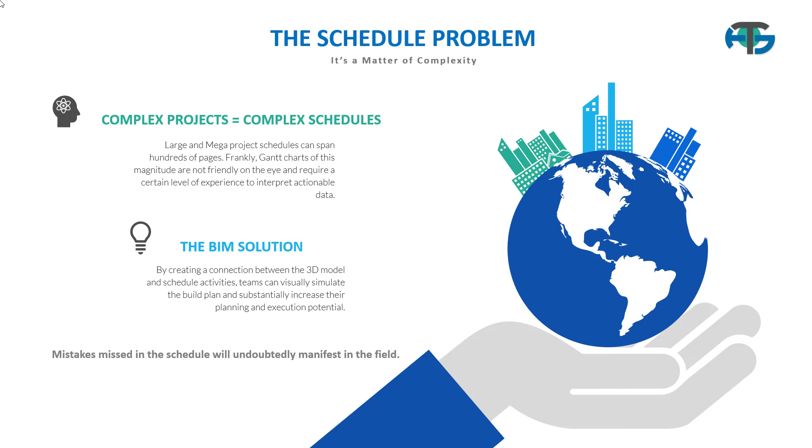So let's jump right into the building information model philosophy and analyze what that really is. BIM essentially allows designers to predict the performance of projects more easily before they're even built, respond to changes faster, optimize designs with analyses, simulations, and visualizations, and ultimately deliver higher quality construction documentation.

But the scope of BIM really goes beyond just the 3D modeling component that it's known for. It's further defined by dimension subsets built upon the most notable third dimension, being the object model itself, to the fourth dimension, or 4D, which includes time, to 5D, which integrates the cost factor, sixth dimension, or as-built operation, to 7D, which involves sustainability and revolving around that carbon footprint, and even the eighth dimension that incorporates safety factors.

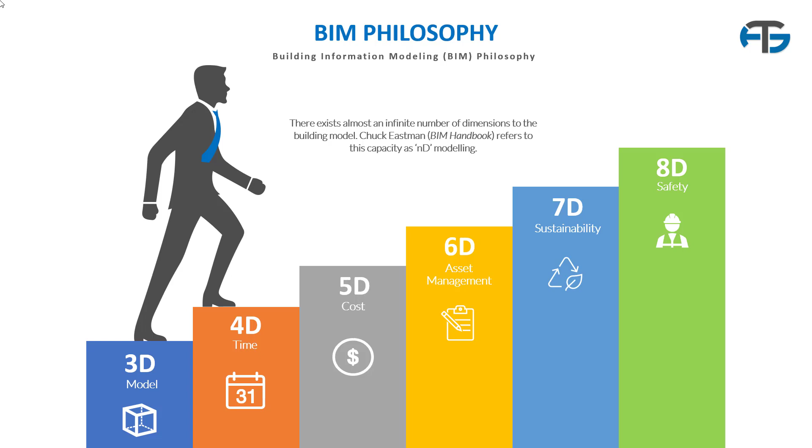Chuck Eastman even expressed in the BIM handbook that there actually exists almost an infinite number of dimensions to the building model, which he defined as ND modeling, or modeling to the nth dimension. Let's really take a closer look at and analyze these BIM dimensions further in the following slides.

So the fourth dimension, in short, is the planning process that links the construction activities within the schedule to 3D models, which essentially creates a real-time visual simulation of the construction process over time. Ultimately, this process enables for the assessment and evaluation of the project's workflow and constructability.

As this will be the focal point for our presentation today, we'll further analyze 4D and its transformative nature for the construction industry in the following slides hereafter.

We'll go over fifth dimension, or 5D BIM, which is the integration of cost to the model, allowing for the generation of budgets, incorporation of earned value management, and other financial illustrations of the model against time. 5D models help reduce time for quantity takeoffs, increase estimation accuracy, and really allow additional time for cost professionals to spend on value improvement rather than revisions.

6D, or the sixth dimension, extends BIM for facilities management. As the 3D model includes valuable data of all building elements and services such as engineering, it provides an integrated description of a building. Using this consolidated description with the geometry, relationships, and property capabilities makes it a useful database for asset management. This is where the prescriptive and preventative maintenance process happens.

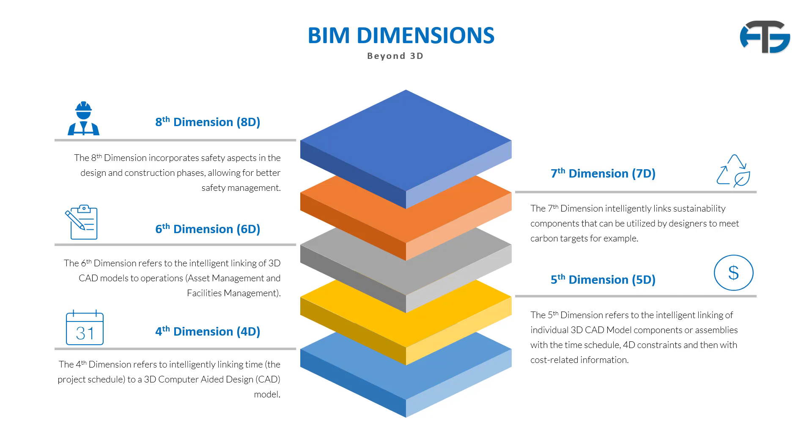So far we've covered the scheduling problem, which was essentially a matter of complexity in today's evolving project environment. We've dug into a little bit of the BIM philosophy and analyzed the BIM dimensions throughout. Now, what I'd like to cover is what 4D BIM and 4D planning actually is.

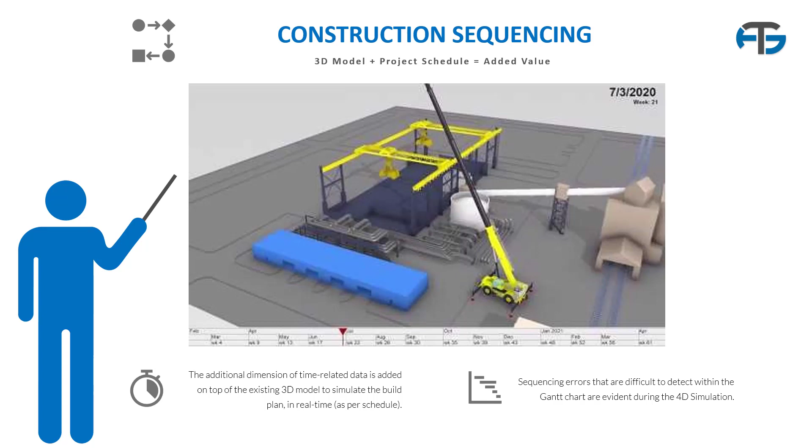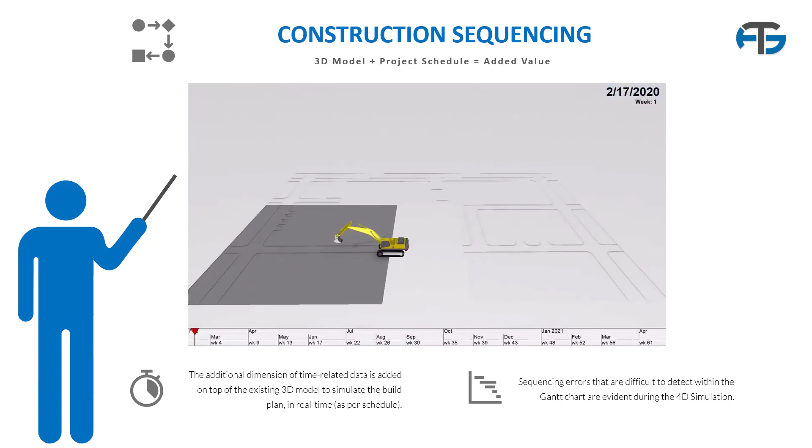So 4D BIM, or construction sequencing as it's often described, provides an additional component of time-related data on top of the 3D model. This additional dimension of schedule information is then associated to specific project components that will be built during the construction phase of the project.

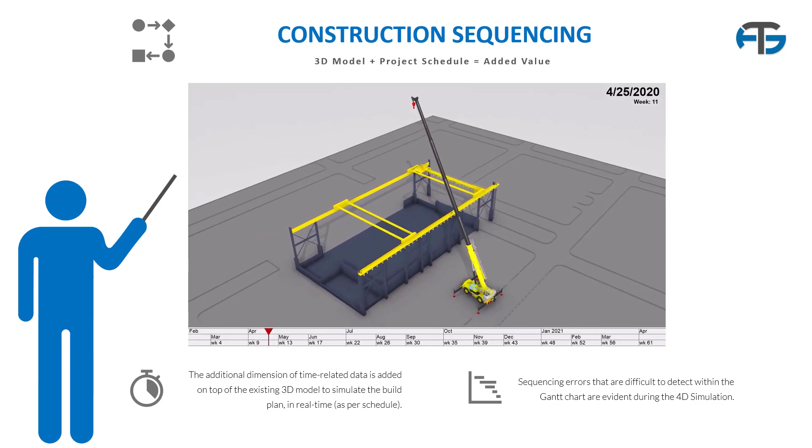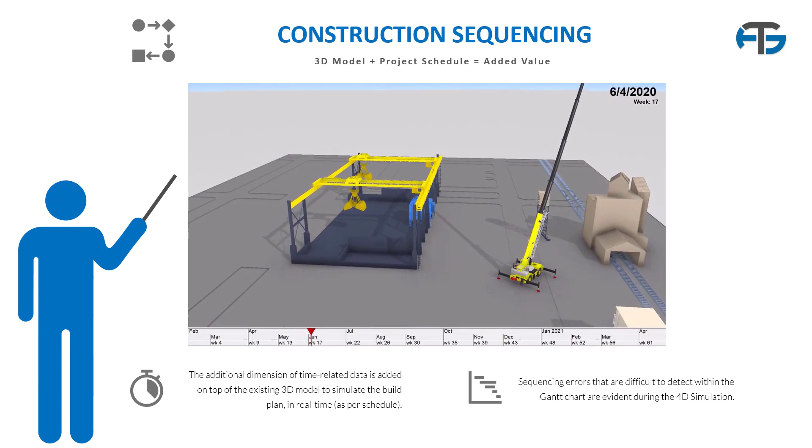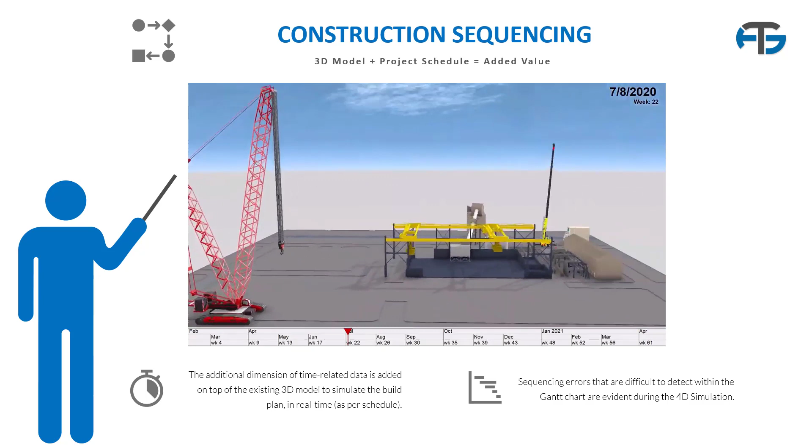In turn, 4D BIM facilitates a step-by-step visualization of the project as it progresses through each stage, as per the schedule. In simplistic terms, construction activities in the schedule, or bars on the Gantt chart, are linked to corresponding elements of the 3D model, which includes plant and equipment. This is executed using additional software, but the sequence can then be played back to simulate the planned construction of the project.

So how can 4D transform your project? Well, the interdependencies between the schedule and the model within the 4D workflow present unsurpassed benefits for managing both materials and people on site. Additionally, 4D BIM really allows planners and construction professionals to engage in schedule optimization exercises in order to sequence project tasks in a more logical and efficient manner.

This, in conjunction with producing an accurate depiction of the construction at every step of the process, provides invaluable benefits for construction projects. The benefits aren't only realized in terms of budget, but also significantly reduce rework rates and minimize delays. Furthermore, 4D planning really offers stakeholders and team members the ability to effectively visualize, detect, and communicate issues regarding sequencing or even path of construction.

Additionally, it's proven to be instrumental in equipment and lay-down area planning, just to list a few. It's really clear that 4D, along with the other BIM dimensions, are transforming the manner in which we design, manage, and develop projects in the construction space. In the following slides, we'll elaborate further on the benefits presented by 4D within the project environment.

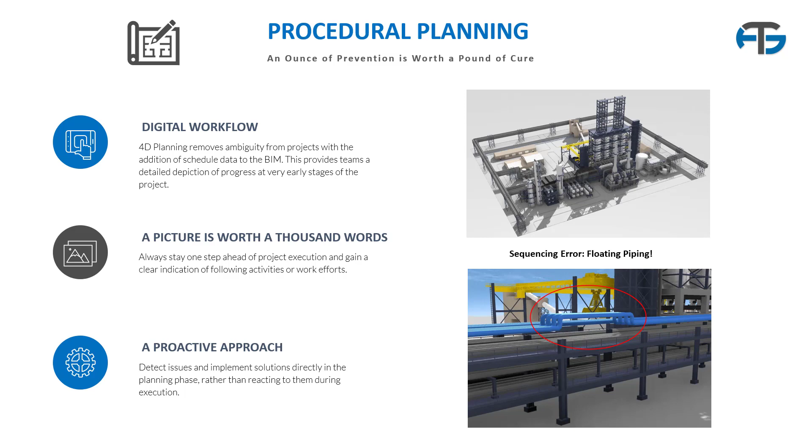One of the biggest advantages of 4D is that the information model quickly conveys and easily communicates the traditional schedule or Gantt chart to stakeholders and team members. Sifting through a 150-page Gantt chart on a large construction project can be extremely cumbersome, especially when putting forward required work solutions within tight deadlines.

With 4D, the project work areas are easily depicted and construction efforts are communicated in real time or as per the schedule, so that essentially all teams and stakeholders are well informed of current and future progression. The ability to communicate construction team efforts before they are even executed is really emphasized by the visual tool provided by 4D BIM. As schedules can constantly change during a project lifecycle, the associated 4D model will immediately communicate any updates back to the team, and appropriate decisions can be made thereafter.

The visualization of project progress provided by 4D really keeps all team members up to date and aligns discipline efforts throughout the life cycle. 4D essentially brings the site to the office and offers a greater understanding of the intentions of various project disciplines. This gives way to less cross-discipline disputes and minimizes time in meetings, which serves as an integral benefit to what 4D has to offer.

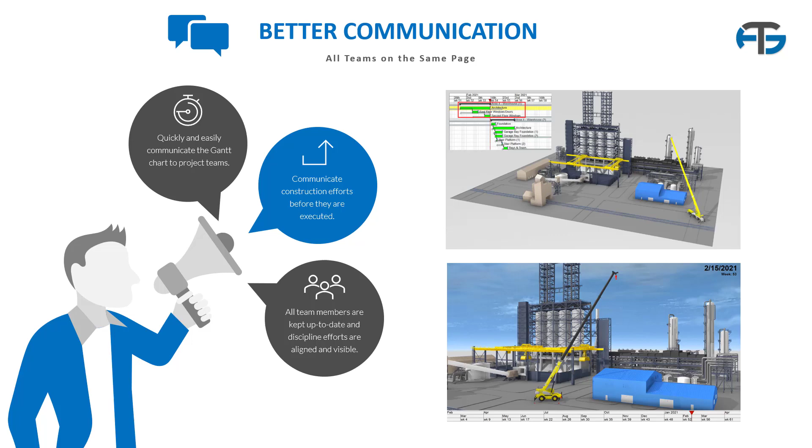Although the benefits of 4D go beyond just communication and planning aspects of a project, they're really seen through the simulation capability that it provides. There are many use cases in which 4D simulations have transformed the planning process of construction projects. 4D brings the site to the office, allowing construction team members to properly visualize all site elements without the requirement of physical presence.

This is further enhanced by the ability to properly simulate construction activities and effectively prevent unforeseen conflicts among work efforts. This 4D capability can further be evidenced through the opportunity to efficiently engage in equipment planning and minimizing the downtime of heavy machinery, such as SPMTs, mobile cranes, or excavators.

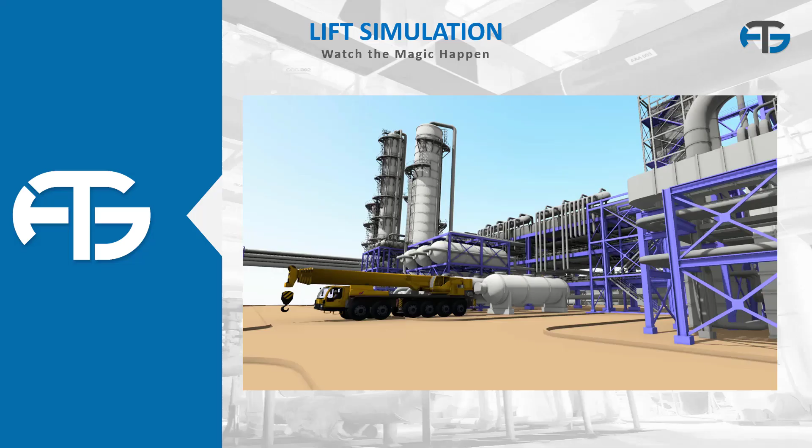Further simulations, such as heavy lifts, can be utilized through 4D BIM for lift sequencing, such as large vessel installation, for example. Further, 4D simulations allow for increased visibility of the path of construction over the project duration and easily identify the critical path from a single real-time model.

Additional examples of simulation include laydown area planning, materials management, and logistical planning, just to name a few. However, the use cases of 4D simulations are endless, and more are identified as projects evolve and construction practices adapt.

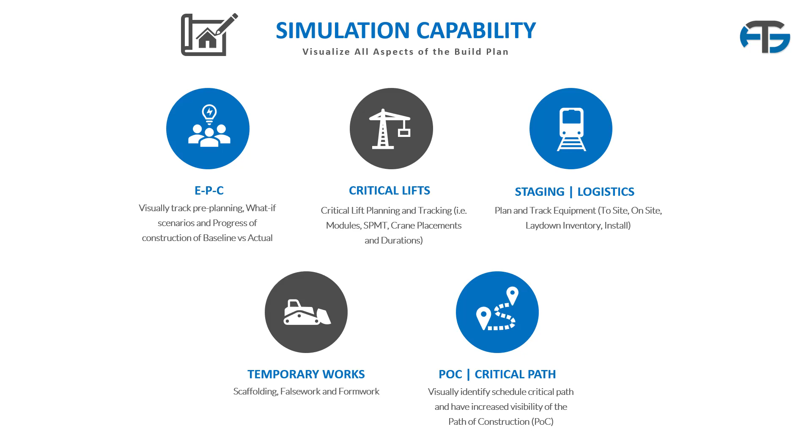In summary, it becomes apparent that 4D BIM can be a game changer in the construction industry. The added benefit of being able to combine the project schedule with a 3D model in order to accurately depict the project's progress in a detailed manner is an extremely powerful tool that helps companies within the space save valuable resources and ultimately increase their bottom line. Teams can leverage 4D programs to collaboratively plan their work, identify out of sequence activities, and improve overall performance.

In terms of accountability and engagement, 4D programs engage the entire project team. When the plan is easily understandable, team members understand their role and how to work within the plan to achieve outcomes. In terms of schedule reductions, 4D programs empower teams to conduct visual schedule reviews, identify out-of-sequence work, perform what-if scenario analysis, and optimize their schedule to achieve improved performance.

Essentially, when schedules are optimized and out of sequence work is eliminated, project costs are reduced. 4D programs are driving quantifiable cost reductions on projects across all industry sectors. And further, good planning is a primary foundation for safe work execution. 4D programs enable project teams to effectively plan their work before stepping foot on site, identifying and mitigating risks before they cause harm. All in all, 4D programs are driving quantifiable returns on all global projects.